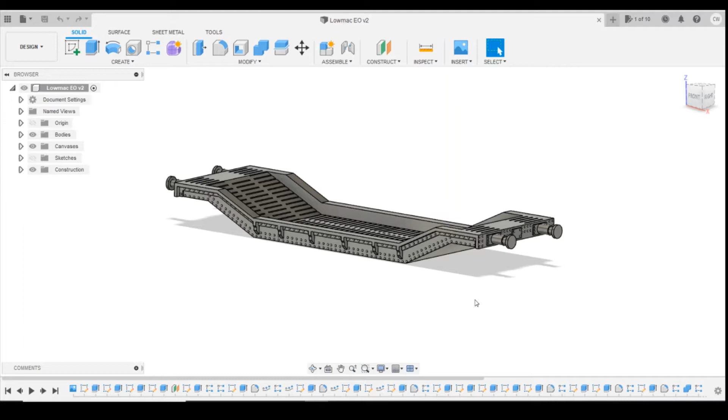Looking at the wagon itself, what we've got here is the W-iron in this area, axle box sitting in front of it, and then you've got your spring above, the ends attached to these hangers which are on the wagon. This is going to be the biggest problem really for this wagon, because normally you could do axle boxes and W-irons in two ways.

You could either print them as a separate part and glue them on like a kit-built type thing as you go along, or you could do them as part of the model. These bits here are going to make it really difficult to have them as a separate part, because obviously you can't then attach these bits here to the front here.

So realistically, in N gauge, what I'm going to be looking at is having this as part of the body itself. If I was to do it for some of the OO boys, I'd probably just leave these bits off, and then they'd have to do those using some plastic card or something like that.

So it's in this area here. Let's jump across back to Fusion. Okay, so now we're back in Fusion.

Next thing we've got to look at and think about is how much room we're going to have on the inside here. So what we can do is zoom in on the bottom edge here—this is going to give us the length from that point to that point. If I click on this edge, you can see down the bottom corner we've got a length of 17.4 millimeters.

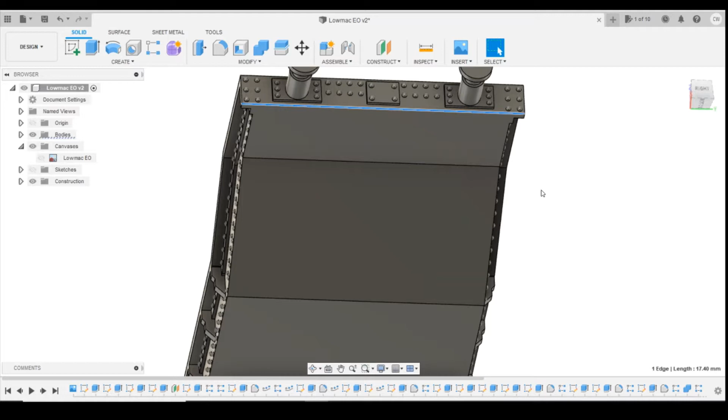So I'm probably taking it down to 15, maybe slightly below 15 millimeters, but it just takes away that sharp pinpoint. I haven't had any issues from doing that running some of my stock on the layout, but obviously the preferred method is to use one of the brass pinpoint cups.

Right, so the first thing I'm going to do in the software is to make our life easier—we're not going to draw it 4 times, only do it once. We're going to use our sketch history to roll back the sketch history past the mirrors, so we're only going to be having one part that we're working from.

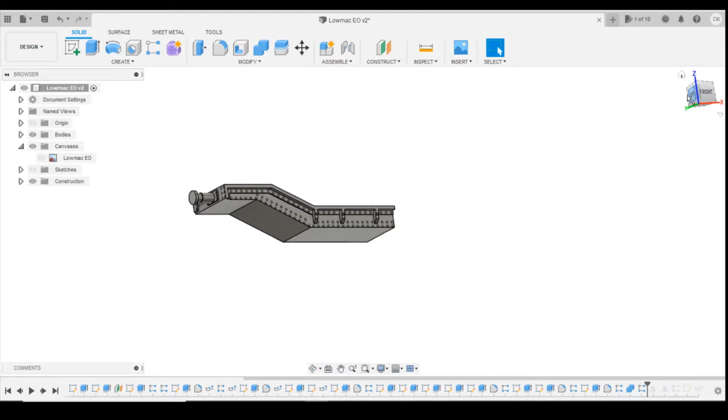Okay, so next thing I'm going to do is create an offset plane that we're going to use to draw the W-iron. So we're going to construct an offset plane from this back face here, and we're going to drag that across to about there in position.

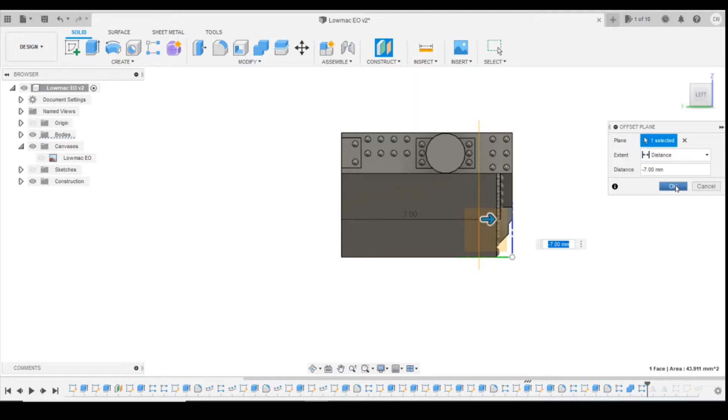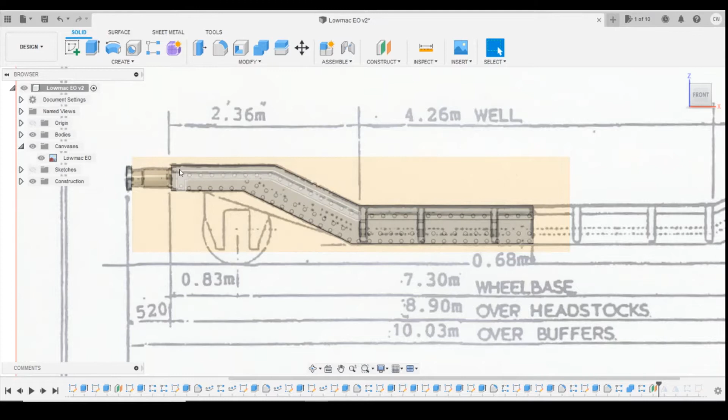Okay, so now we've got that offset plane. If we spin this round so we're looking face on, we're going to turn on the canvas with a picture of the wagon on it. We're going to use this to actually draw the W-iron. So as you can see, it's drawn on there, and we're going to create a sketch on that offset plane we've just had.

Okay, and we're going to copy around this W-iron. So we'll come down 2 millimeters and angle across, and then it comes to the midpoint of the axle. And then we'll draw a line upwards and click OK. We're going to use that line as a construction line.

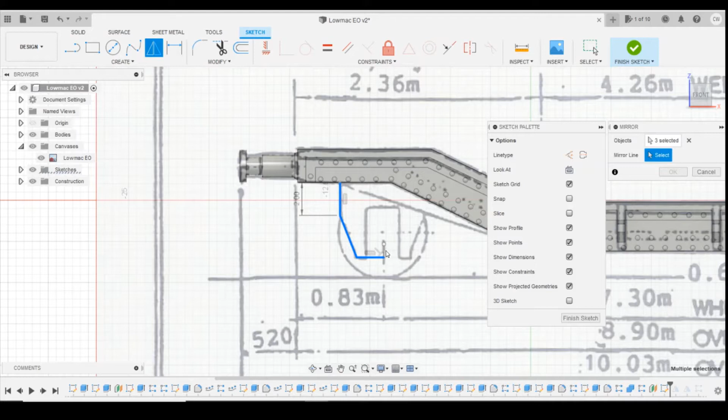So the next thing we're going to do is select those, and we're going to mirror those using that construction line there, so that we now know both sides of our axle are going to be the same size and shape.

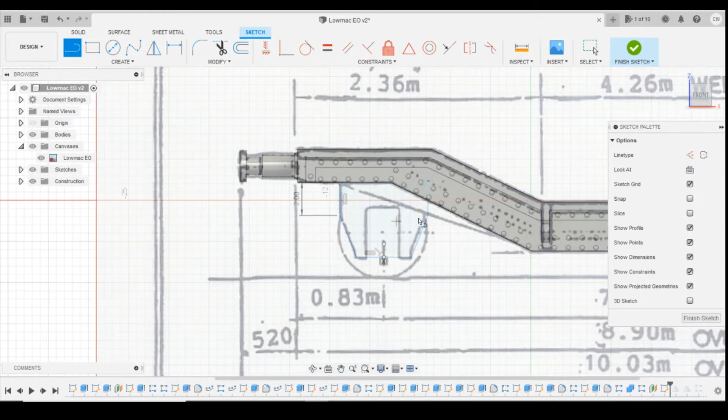Okay, obviously that's coming up behind into the body here. And to be able to extrude that, because as you can see it's not changing colour like the rest of it, I need to draw a line across here to join those up, so that's now a closed face. Okay, I can now come in and extrude on that surface.

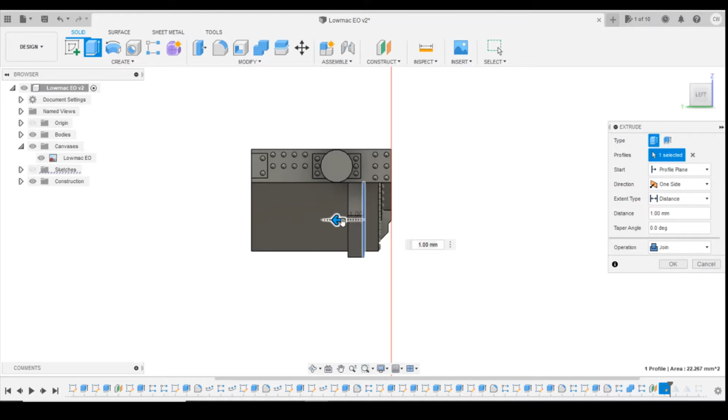So if we extrude that, we'll turn that around so we can see what we're looking at, and we're going to extrude inwards by 1 millimeter, and we're going to tell it to join. So what we've got here now is the distance from this position to this position.

Okay, we can inspect that at the top here with a measure tool. This should be about 6 millimeters, so from that corner to that edge, 6 millimeters. And if I measured my wheel, the outside faces of the wheels across the axle is just slightly over 11 millimeters. So obviously that's going to give me about a 0.5 millimeter gap each side.

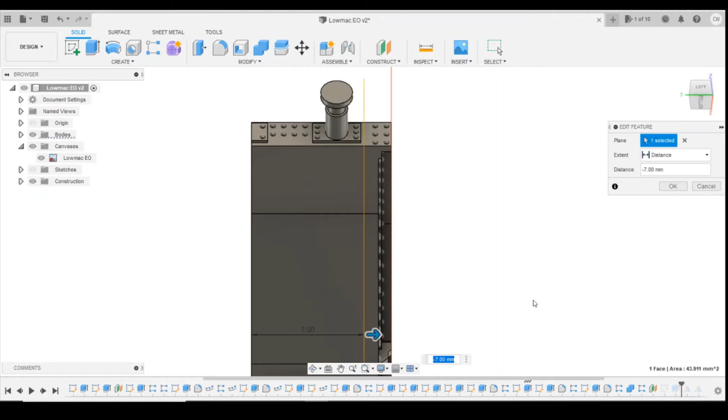Now I can change this, and I probably will change this a little bit. I'll probably just extrude out on this side slightly and dig this back in slightly. But the best way I can do that is if we go back to the sketch history, edit the offset plane, and we're going to change that offset plane to 7.3 millimeters. What that will do is move this extrusion across with it.

So if we now inspect this, we can measure from that corner to that face, and we've now got 6.3 millimeters, which gives us 12.6 millimeters in total, which is going to give us about 1.6 millimeters clearance across the axle between the wheel faces and the back of what we're printing. So I'm going to be quite happy with that.

Okay, so the next thing we're going to do is try and draw this backing plate off the axle box here. I'm not going to try initially with this strap here, I'm just going to do this square rectangular backing plate before the axle box. So come back into Fusion.

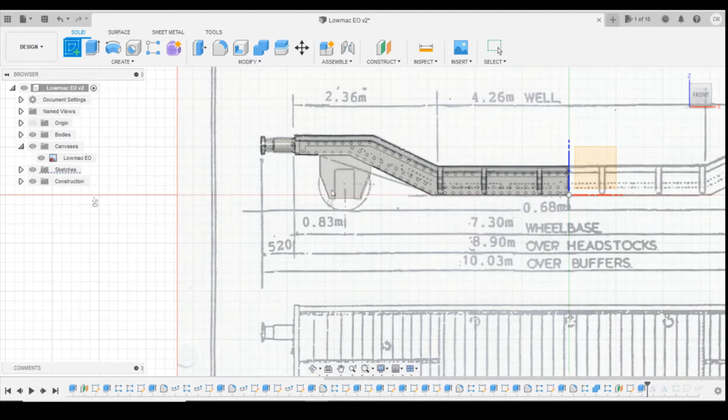We'll create a sketch on the front surface of the W iron. I'm going to use the center point rectangle, and we're going to define that point on that pinpoint where the axle's marked. I'm just going to drag that out slightly. Okay, I'm going to go there.

Okay, and what I need to do now is make sure this is centered across our drawing. And you can see that it's not, it's offset slightly. But that's because I don't think the drawing is 100% accurate, so we're just going to make the best of it.

We're going to define the distance from that face to that face. I'm going to go with 1.3 millimeters, and then we'll do the same on this side, that face to that face, 1.3 millimeters. Okay, now we know that's going to be centered across that position there.

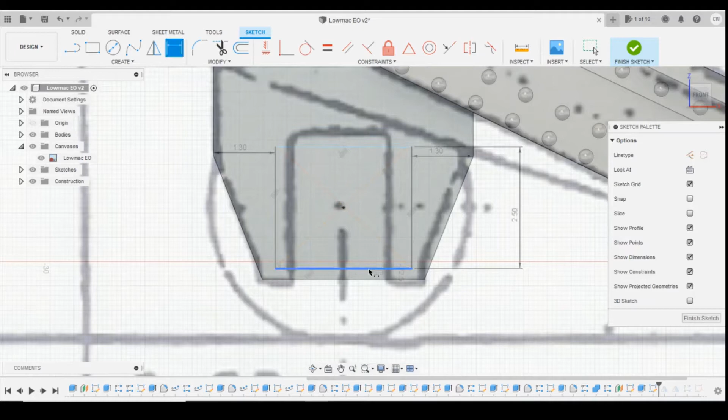We can then define the height. We can go 2.5 millimeters, and we'll define the height from there to there. It looks a bit low to me - yeah, it is, so I'm going to bring that up a little bit. Let's go for 1 millimeter, see where that moves it to. That's way too high, so go 0.5, and then we'll probably just bring this down slightly to 2.3.

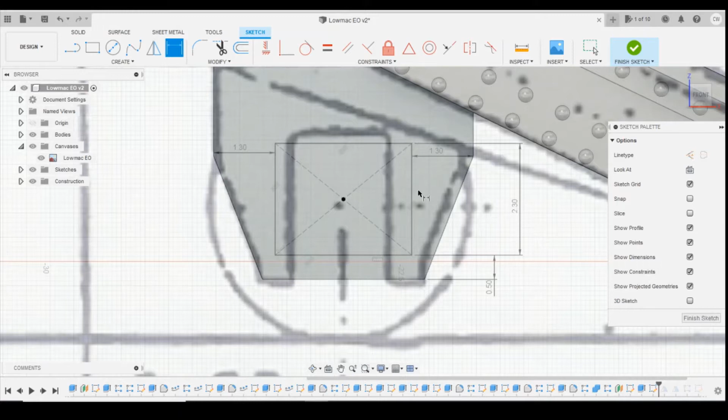Okay, so now we've got this in the position where we want it. We're then going to extrude this forward. And looking at the diagram or the picture we're looking at, it's not a particularly fat plate, so we're going to come out 0.3 millimeters.

Okay, so we don't need this canvas anymore, we can turn that off. So we've got this back plate, which is what we're working on here. Next we're going to do is the axle box.

Now if you look at that, it looks like it's not square, it looks like it's got an offset lump coming outside here. So it could be two rectangles with another rectangle coming across the middle here. That's basically what I'm going to draw now. In the double O, if you've got better pictures, maybe that's diagonal there, I'm not quite sure, but we'll go for 2 rectangles. In N gauge, you're not going to notice it, to be fair.

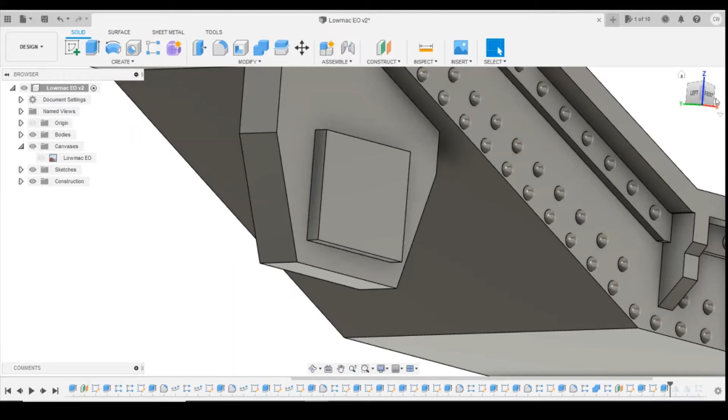So let's jump into Fusion again. We'll create a sketch on this front plane, and then we'll go back to the center point rectangle. We'll find the center point for this face, and it was full height to the body, so we know that's going to be 2.3, and we're going to go for 1.8 wide by 2.3. Okay, so happy with that. So you can fix that in position.

And the next thing we're going to have is a rectangle that goes the other way. So again, we'll go for our center point rectangle. We'll go 1.1 millimeters tall and 2.4 millimeters long. Okay, so then if we select all of these features, we can then extrude it.

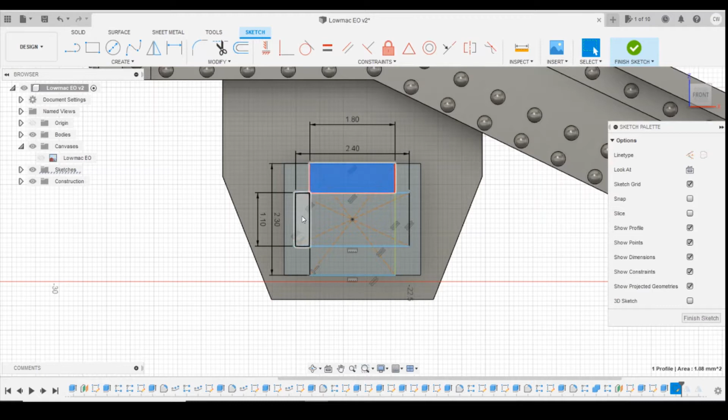Okay, so that's ready for the extrude. Let's have a quick look at the picture. Okay, and we're going to drag that about 1 millimeter. Okay, how's that look? Yeah, looking good, happy with that.

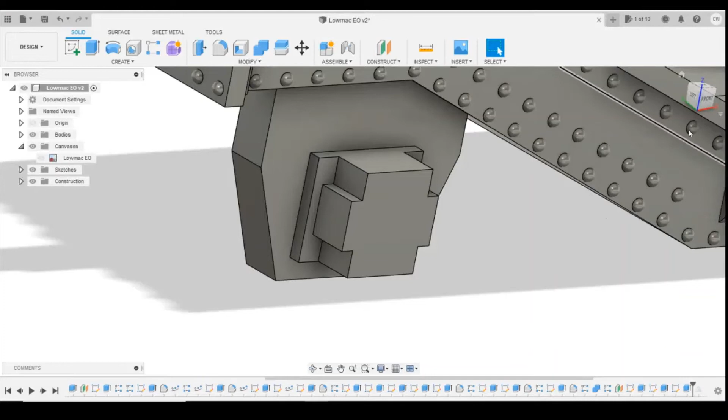Next, we're going to draw this strap coming up the back here. Actually, no, we won't. What we'll do is we'll draw the spring on the top here. Springs can be a bit of a pain to draw, and I just generally go to draw it so it looks like a spring. It's never going to be perfect. You're never going to get it looking exactly the same, and in N gauge you're definitely not going to be able to define the gap between each of the leaves on there. So I just sort of go for a shape that looks reasonable, and then work from there.

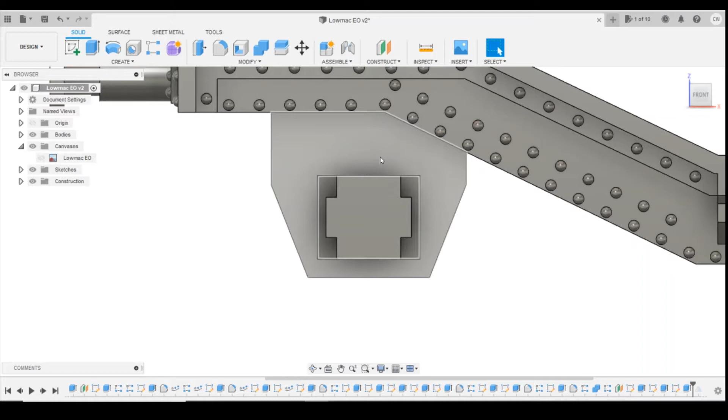Okay, so I'm going to start this leaf by drawing on that back plate there. Initially, I'm just going to draw a center line coming up here, and I'm going to change that line by selecting it into a construction line so I can then work from my midpoint here. Okay, so the next thing I'm going to select is a line and make sure that it's not on construction line.

Actually, I don't want a line, I want a... I'm going to go for a line. I'm going to start it about halfway up, and I'm going to bring the leaf across 2.5 millimeters.

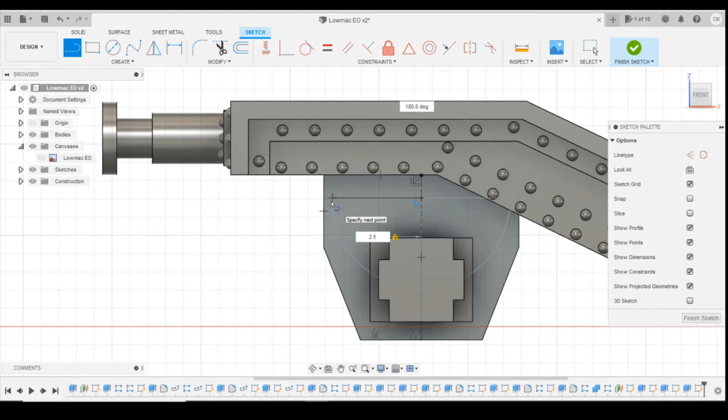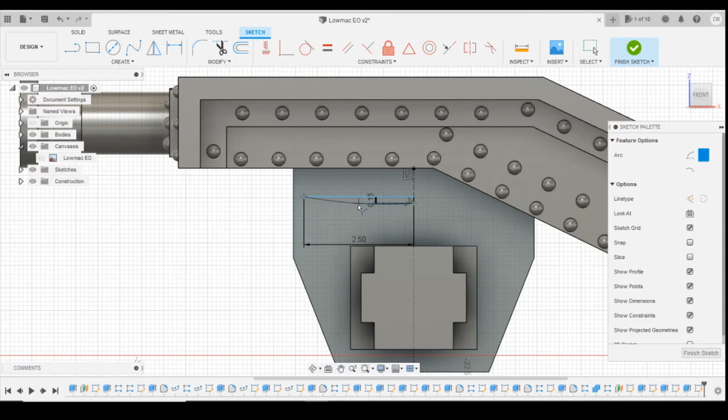Okay, and I'm going to draw a line down. Because the leaves are slightly curved, I'm going to use a bit of an arc here. I'm going to go 0.15 millimeters. Okay, the next thing I'm going to do is come into arc here, and I'm going to create a 2-point arc, use the 2 end points, and I'm just going to move this around so that I've got that curved and it's on the straight line here. I'm going to go back there. Okay, and then I'm going to fix that into position.

Okay, next I'm going to bring a line down here, 0.2 millimeters, and what I'm then going to do is I'm going to use an offset tool. I don't want the tangent, I don't want change selection. Turn that off. Actually, come back to offset, turn change selection off. I want that line, and I only want it 0.2 millimeters. And then I do again, offset line, 0.4 millimeters. And again, I keep working my way down until I get down to this top of the axle box here. So offset line, 0.6 millimeters.

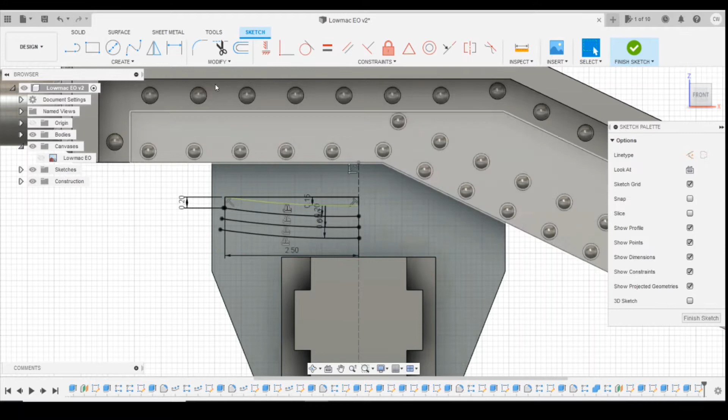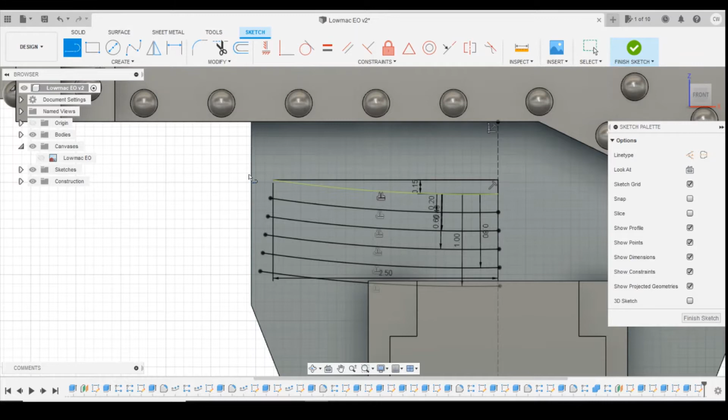Okay, so I'm going to go back in and delete that line out because I don't want that there now. So what I've now got is the leaf springs, each one coming down here. There's not going to be as many here as on the actual model, on the actual wagon itself, because you just can't define it at this sort of scale and size. So I'm just going to draw a line down there that connects, and then work my way down the leaves here so I get what looks like the same stepping design.

Start there, come down, there and down. Okay, and then what we can do is define that point to that point. It's 0.5 millimeters, and then do the same here, 0.5.

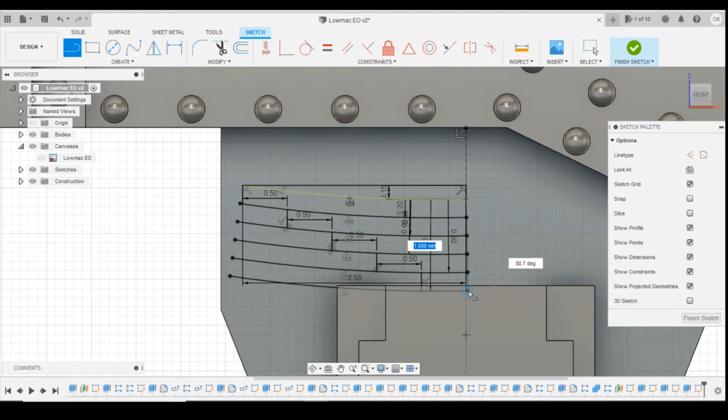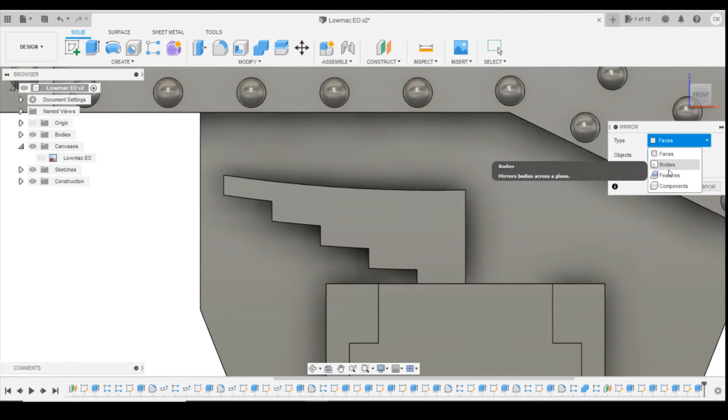Okay, and now we've got these here. What I'll do is draw a line that comes down this center line there, connects. That then will now enable me to select all of these like that, and then I can extrude that 0.4 millimeters, and then I can mirror this object across. So if we go to create, mirror, select those features, and the mirror plane will be that base there.

Okay, just check how it's all the same in one body. Okay, so you can see I've now got the shape of my leaf spring. I'm not going to waste my time drawing all these lines up and putting a tiny little sliver in there, because in N gauge you just won't see it, and in Double O you're probably not going to see it even if you look at them. They're the smallest of gaps between each leaf, so realistically it's just not really worth it.

Okay, so the next thing we're going to do is there's a cube or a box that goes over the top of the springs here, so we're going to draw that same thing on there. So we'll create a sketch on that face, 2-point rectangle, and we're going to draw that here, define the distance from there to that point, 0.3 millimeters, and the same, there's 0.3 millimeters.

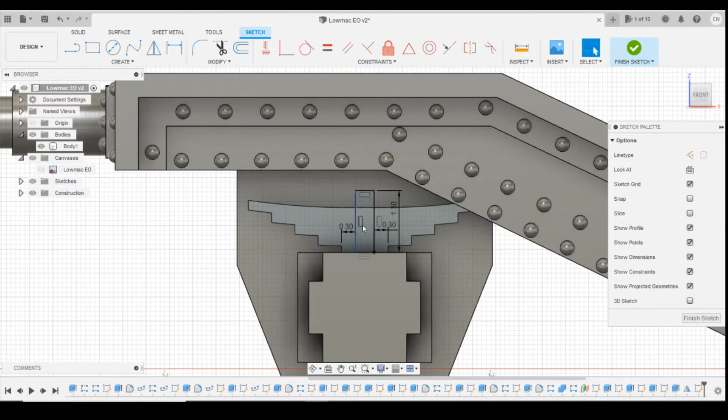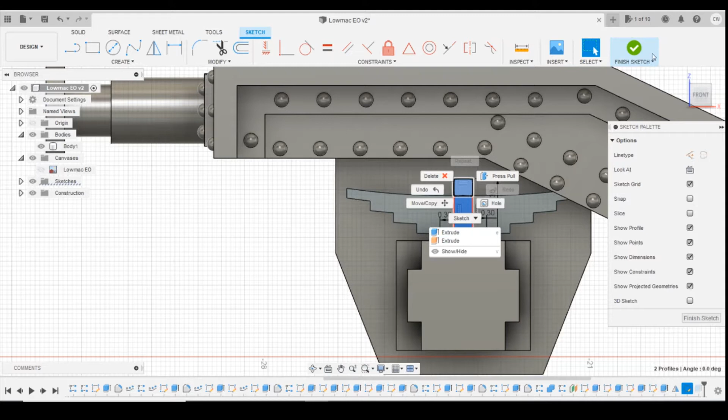Height wise, it goes, if we look at the picture, it goes up above the leaf springs here, so we'll go up above as well and define that length, 1.3 millimeters, and then what we can do is extrude those back into the face, making sure that it joins and not cuts. And what we'll do back is also go back into that sketch, and we'll extrude it forwards as well. Sorry, don't do that way. I want to go back into edit feature and do two-sided extrusion, and we'll come forwards slightly.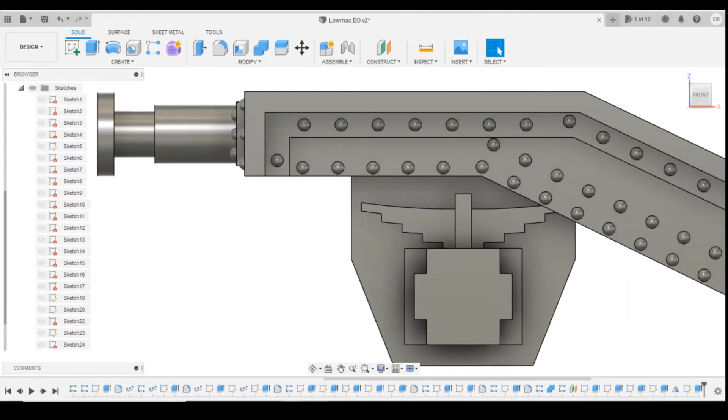Okay, so the next thing we'll do is this strap here with these 4 rivets on here. Let's see if there's a clearer picture on the other side. No. So we'll go with 4 rivets for the time being. So if we jump back into Fusion, create a sketch on that plane and a rectangle coming up, and we'll come just below the spring there, and we'll define it as 0.4 millimeters in width and 2.6 millimeters in height.

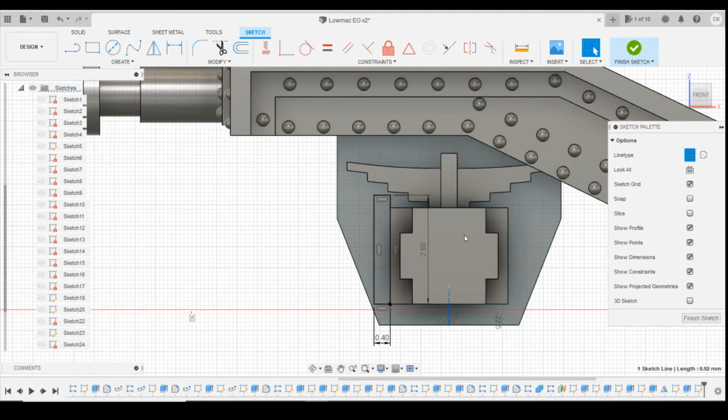Okay, and we want a construction line here. Turn that into construction, and the reason for that is I'm going to mirror this across. Actually, ignore that, because I'm going to draw the extrude and draw the rivets on first, then I'll mirror it across. So if we extrude this forward slightly, we can't come as far forwards, can't come as far forward as this plate here. So if we just extrude it 0.2 millimeters, that looks okay.

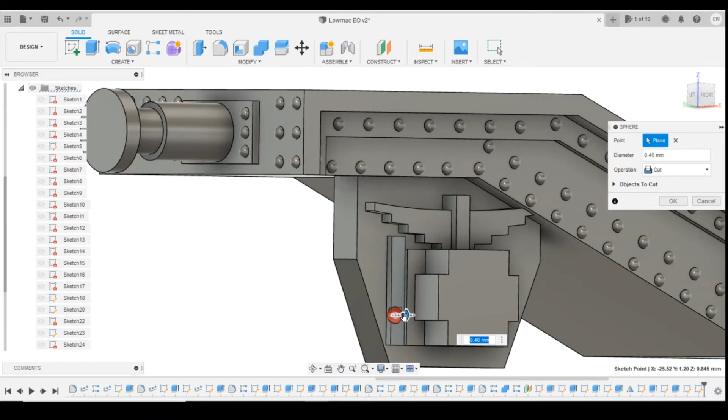And then we'll draw the rivets on the front here. Now, if you remember the last lesson that we drew rivets, we just used the center circle here. What you can also do, if we come out of that sketch, is do spheres. We can draw them on this face here. Okay, I don't like doing it because I find it difficult to place them. I just prefer doing it by drawing the sketch and filleting them.

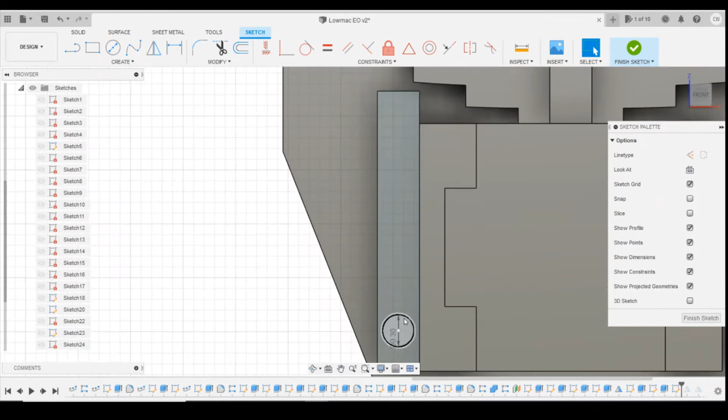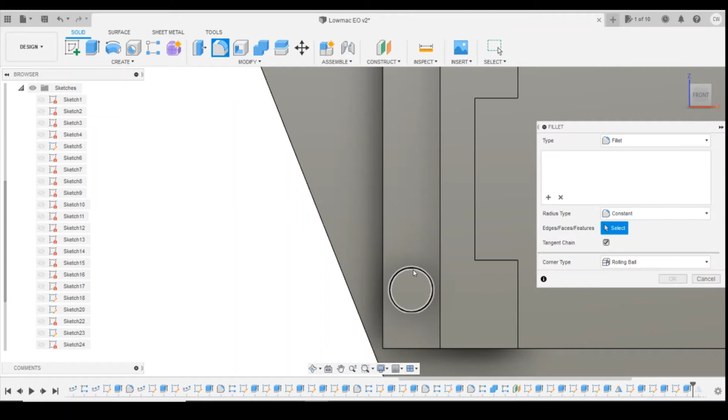Each to their own. So if we go back into this sketch here, and we'll do a circle, we'll find the center point, 0.3 millimeters, and we'll define the height, 0.4 millimeters, make sure it's in the center here, and then we can extrude this out, and then fillet off to top here, 0.15.

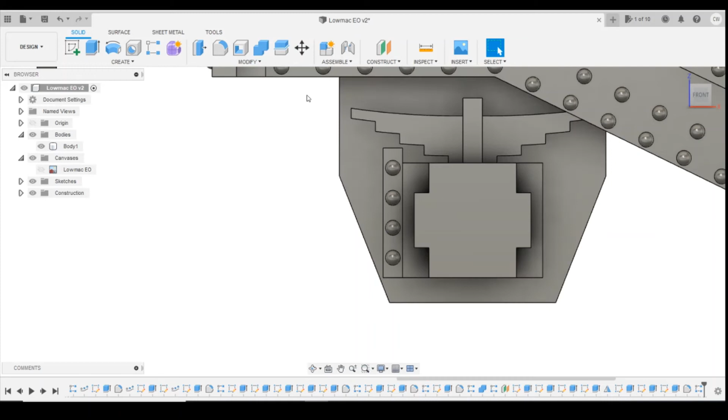Okay, and then we can do pattern, and we'll do select those, it's time to do faces, select those two, direction upwards, we need 4 of them, okay, and then what we want to do is mirror this all across here. Okay, so what we can do is the pattern again. So if we do pattern and extrude all of that lot in that direction, we need 2 of them.

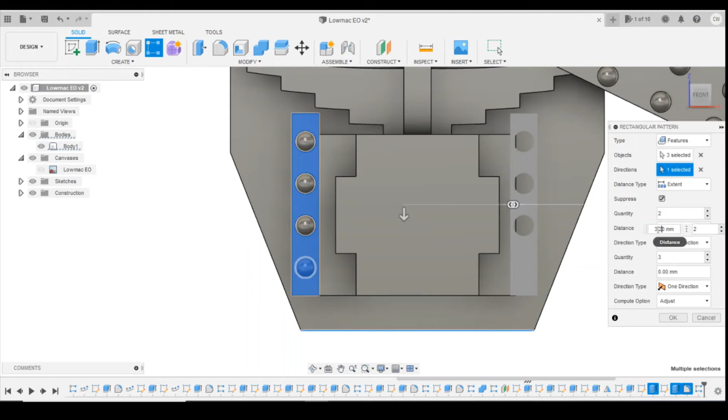How long was this face here? Need to move that slightly.

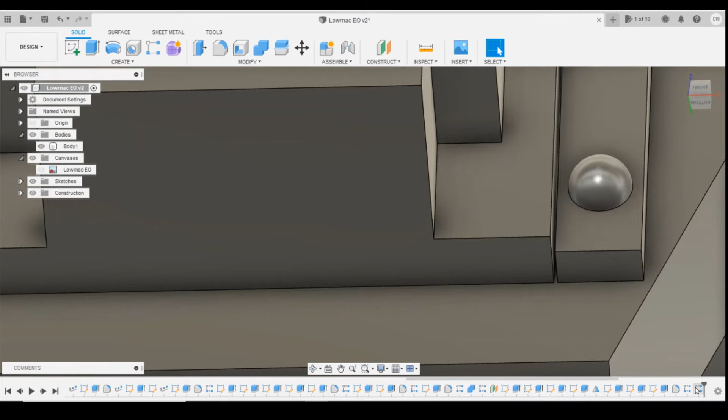Wait a minute, it's copying the whole of this face over. Let's have a look at this. Okay, so let's delete that. Come back into that one there, edit feature, and change it to new body.

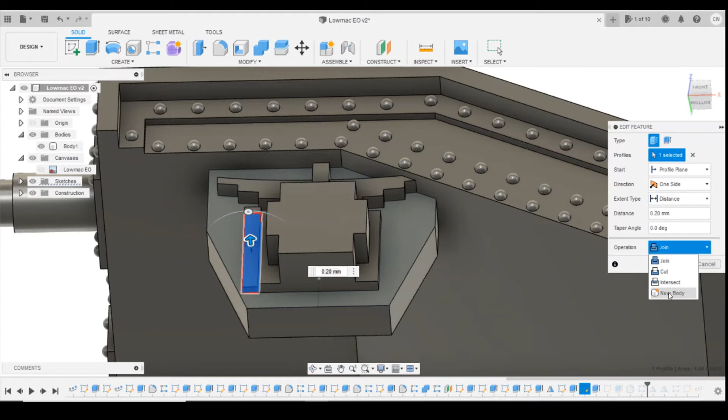Then what we can do is copy that over the correct distance, which is 3.5. So if we mirror that, and that, we can drag it that direction. We only need 2 of them.

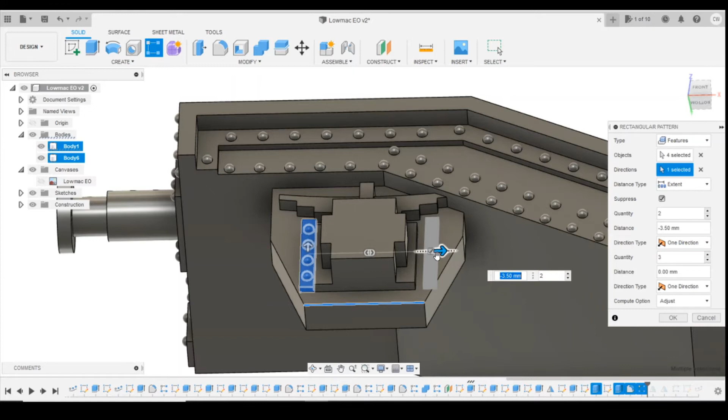And then what we'll do is we'll combine that body with those 2 bodies. Okay, so now we've got those straps on both sides there.

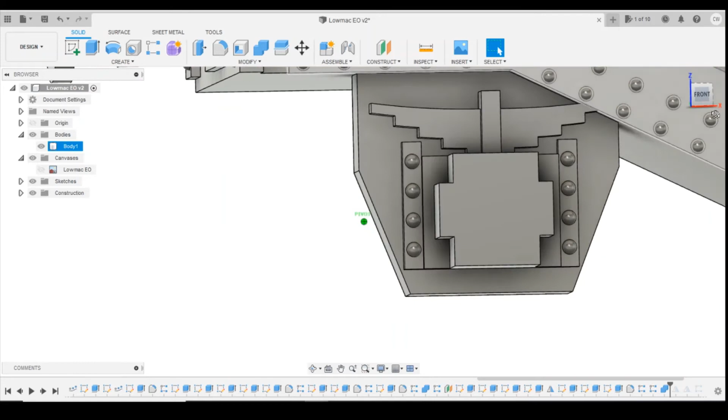So if we grab an offset plane, change to this face, and we're going to drag it across in line at 2.6 millimeters. And then we'll create a sketch on that surface there.

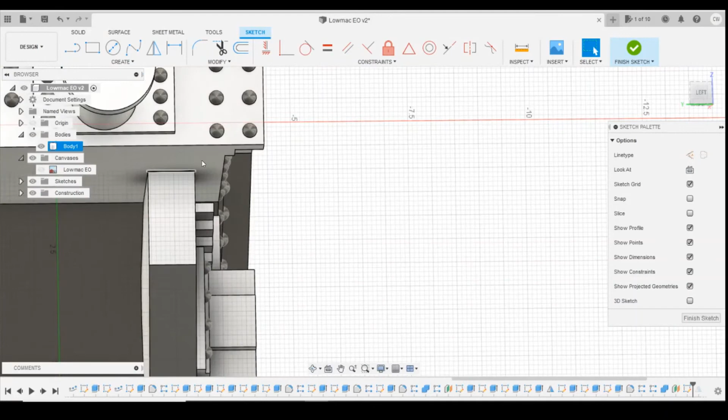Okay, so we're going to have a flat back, come forward, diagonal up, and then straight down off of the front of the sole bar here. So front of the sole bar is here. So if we have a line that comes down like this.

Move that point down slightly. Actually, it needs to be coincident to that line. You won't do it with that edge there, so we're just going to do it by eye. Okay, so it comes down, diagonal.

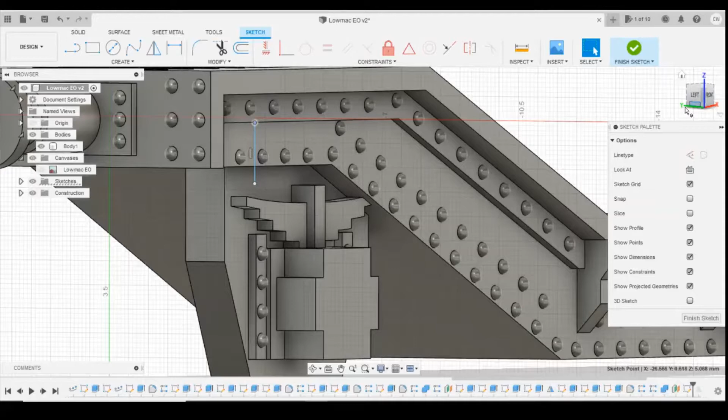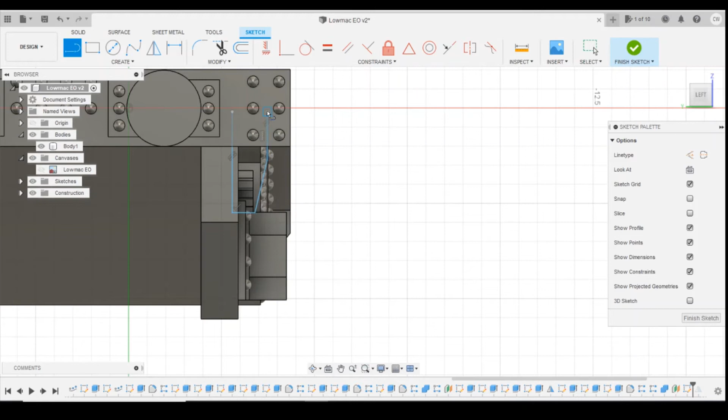Okay, so we're going to draw a line. Same height, I'm going to come down. It's in line with the top of the axle box here. Come forward slightly, past the spring, and then diagonal to that one. And then if I get another line, I can close that top surface there.

Okay, and then I can extrude that drawing in slightly. I'm going to tell it to join. It's going to come in 0.6.

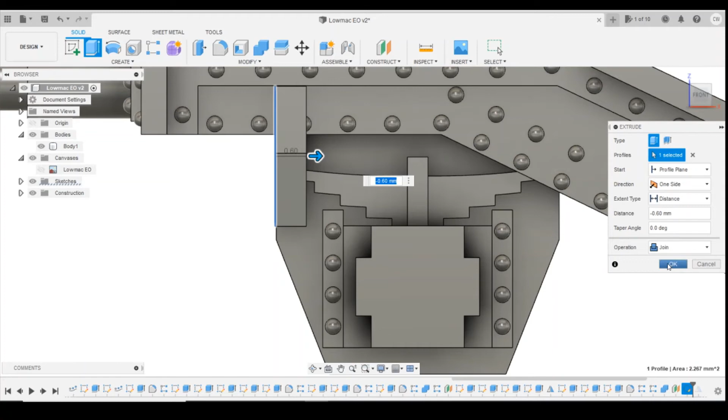Yeah, what I'm going to do is edit that feature. I'm going to have that as a new body to start with, because I want to dig out some of this inside here. So if we spin that round and we're going to draw on that surface there, we're going to find offset, change selection, that edge, that edge, that edge.

I want it on the inside to be minus 0.2 millimeters.

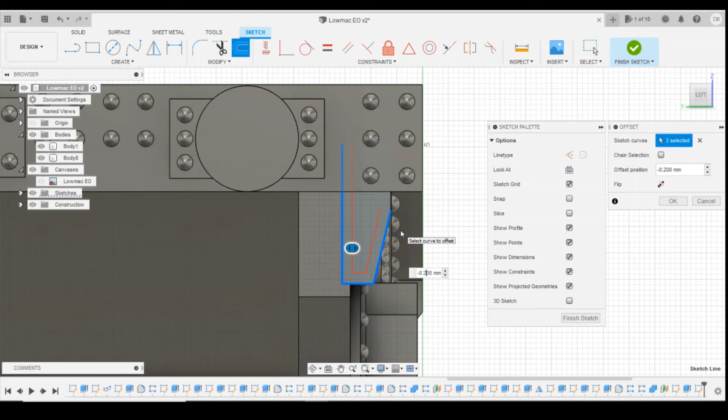I'm not sure that's going to print particularly well, to be fair. I'm going to cancel that. I'm going to leave it as it is. Delete that sketch, because if I dig that out, I think what I'll end up is it's not really big enough to print particularly well. So yeah, I'm going to leave that as it is there.

Okay, so if we look at the next one, it's going to be roughly in line with the bottom, but it's not going to be as high as the top on this one. So again, it's got a slightly different diagonal angle here, so we have to draw that shape completely differently.

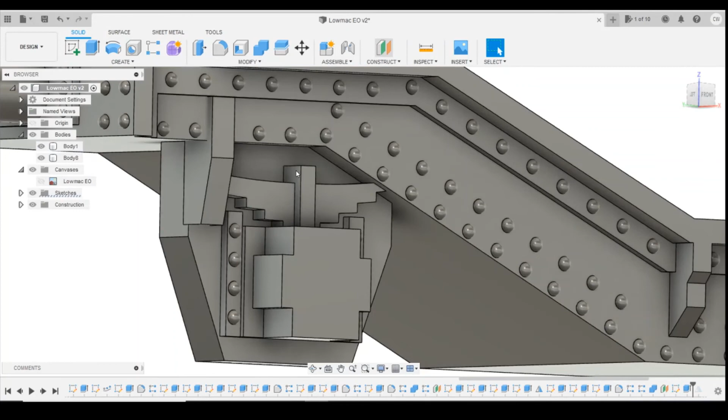Same process though. So if we come into Fusion, we'll create an offset plane, and we'll bring that across in line, about that position there. And then we'll draw on that surface there.

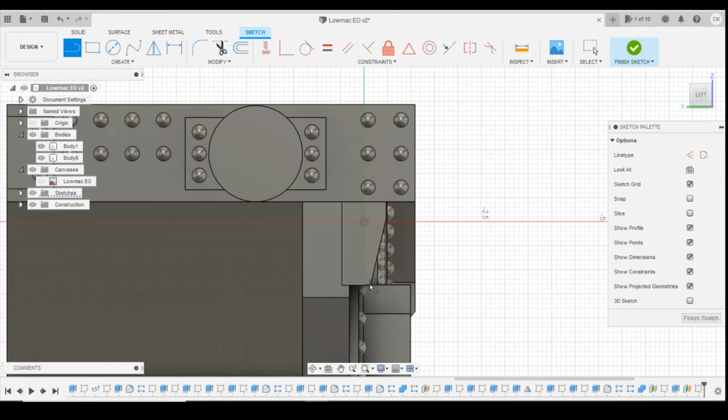Okay, so we know that the surface needs to be in line with this one and comes out at the same distance. So what we can do is the same lines there. We should be able to put, if I move that whole line down slightly, a horizontal constraint to those 2 points.

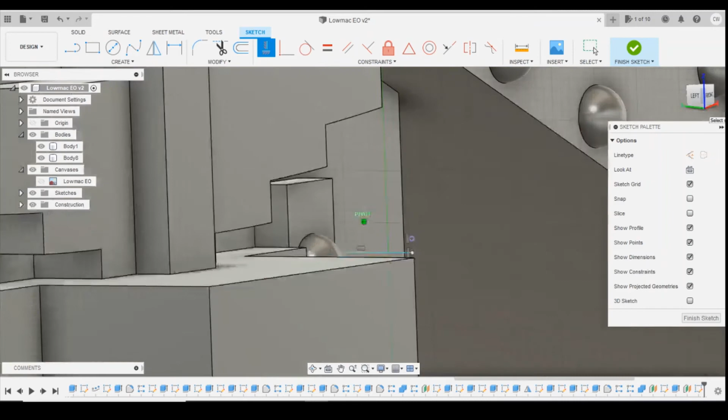Why has it not done that? I was expecting that to snap upwards. Let's take those out. Let's try coincident constraints. Yeah, that's the one I'm after. So it's the same height and the same length. Okay.

Then what we'll do is we'll draw a line. Let's spin that on so we can see where we're looking. Up here, so we can see how it's vertical here, because I've got that little blue square that appears in the corner, so I know that's at 90 degrees, like that. Come forwards, and I want it to be in line with this here.

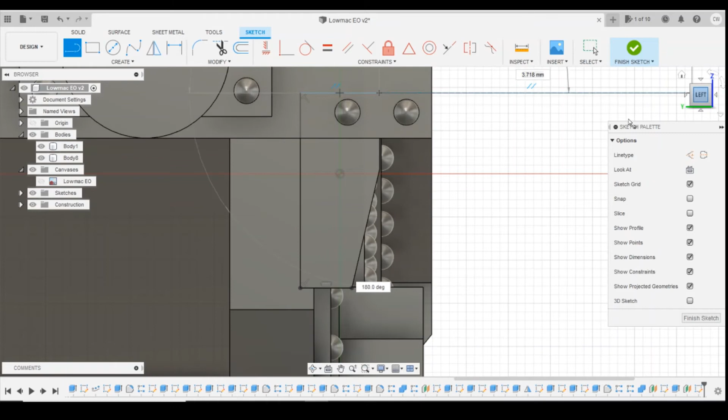So if I then do escape, horizontal, vertical, that point to that point, they should then snap in line. And then we can come down, spin slightly so we can see what we're looking at. Where's my line gone? Oh, I've turned it too much. Turn onto that face there, that's it.

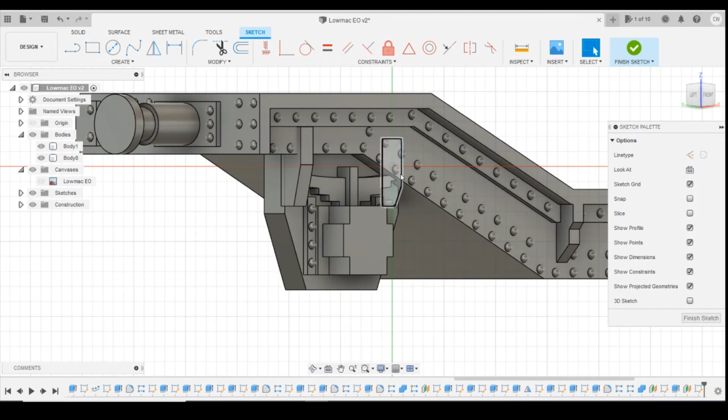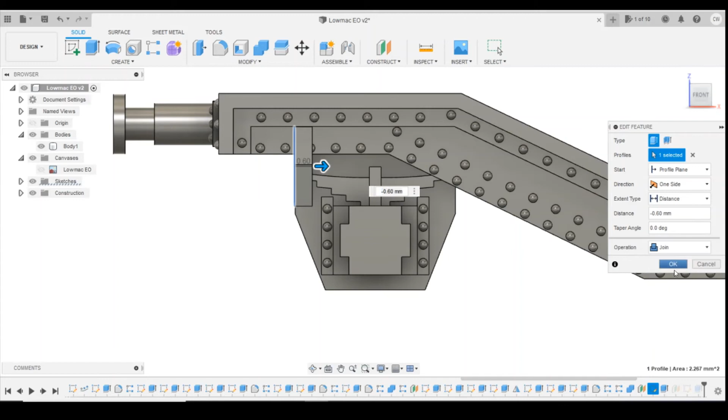Okay, so let's have a quick look in here. So it comes just below the sole bar and then diagonals into that one there. That's it. And then I can extrude the same distance as 0.6 millimeters. I'll take to join. We've got to combine these two bodies, so we'll come back to this one because we were going to do something different there, so we'll just tell that to join instead.

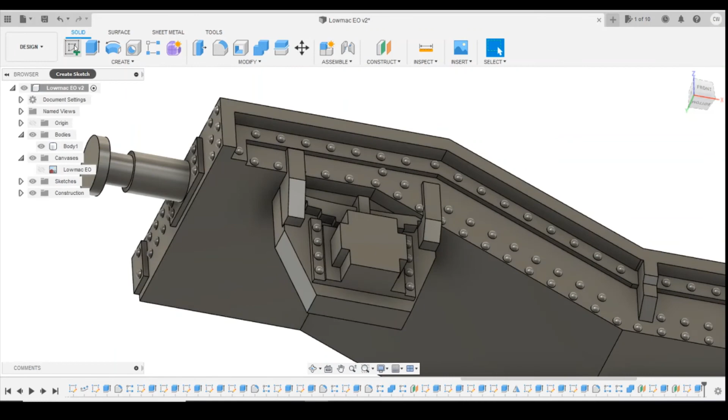Okay, so we've now got those two parts there. Let's just check the height of this. Yeah, that looks okay, it's quite a tall part there. And then the bottom of these have both got bolts and nuts coming out the bottom, so we're just going to draw a little pipe coming off the bottom here that's connected to this back plate.

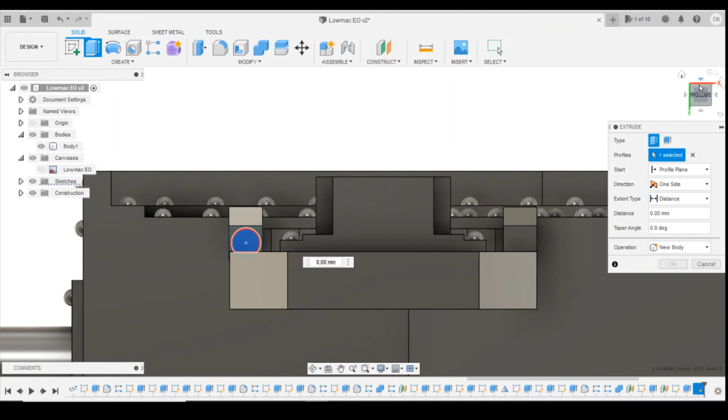So we'll draw on this bottom surface here. See how I'm making sure that part of this pipe is going to touch that W iron, so when I print it, it's going to be supported by the W iron. So we're going 0.5 and then drag that downwards. So as that prints, that'll all be part of it. So come down 0.6. What I might do is actually change the diameter slightly there.

So if I edit that sketch, let's go 0.4, it's a little too thick, that's it. Okay, and we'll define distance from front edge, 0.3. Let's just measure this. So that's 0.3 down here, it's 0.6. So define distance from the centre to there. It's 0.3, we know that's centred.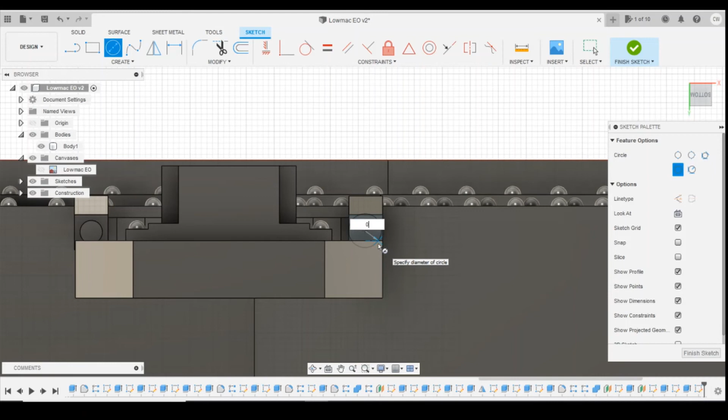Okay, we'll do the same on this surface here. Four millimeters distance there. It's 0.3, add it. And then if we extrude, all we have to do is select the bottom of that face and we know it's going to be the same height there.

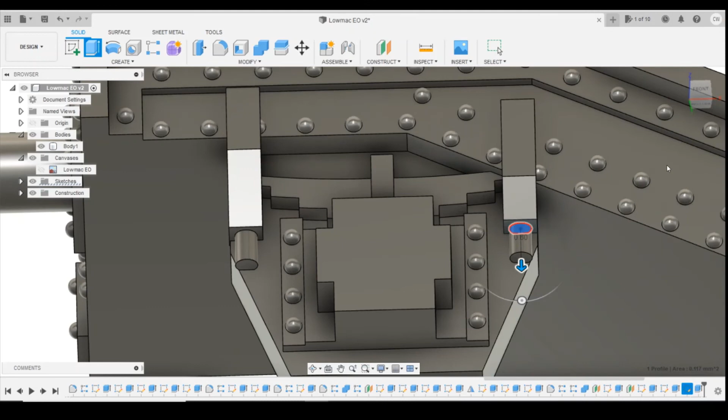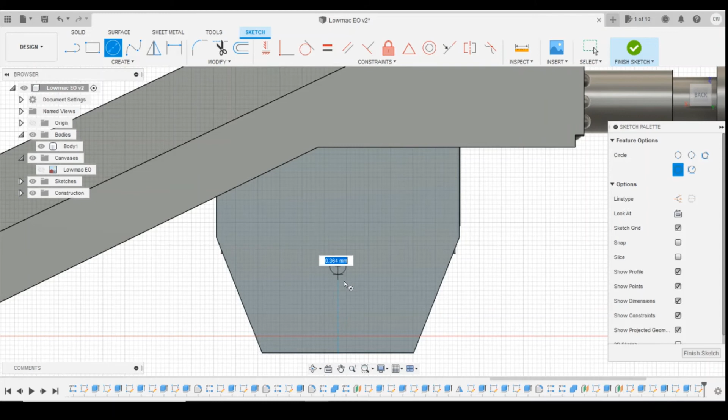Okay, so if we create a sketch on here, we come to center point circle. We'll find this midpoint here by running along the bottom edge till we get to this triangle. We'll come up and I'm going to draw 1.8 millimeters. The reason for that is obviously it's 1.6 millimeters in diameter for the cup. I want a little bit extra.

It may need a little bit more because sometimes resin swells, so you may need to drill this out a tiny little bit with a pinpoint drill just to make it perfect. Or what you could do for future runs, if you're going to print multiples of them, is obviously once you've printed the first one, you'll know how much it swells, whether it's okay or not, and then you can come back in and change the sketch in the future. So we'll just go for that 1.8 millimeters to start with.

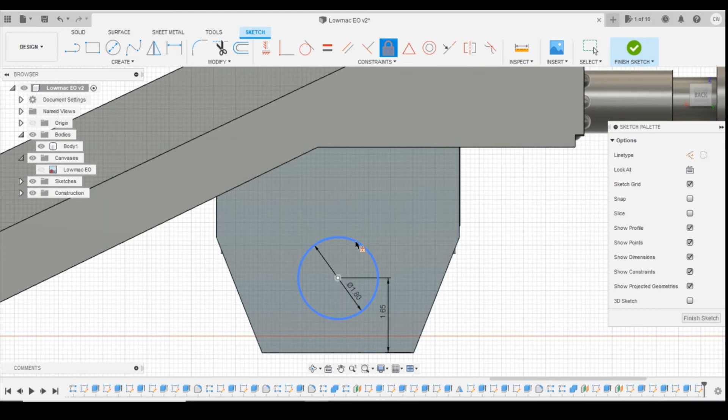We'll define the center point with 1.65 millimeters upwards. We'll fix that in place. We'll then extrude that into the axle. If we look at this, it was 1.3 millimeters, so we'll need to give ourselves a little bit more than that. So if we extrude inwards, if we go 1.5, that should give us enough room there to fit it in all the way.

And then as you can see, there's enough block around the outside to not give us a concern with this bit, this inside wall being too thin. If we look at the front surface, it's a bit close on these corners here, but that should be okay because all this is supported off of this back plate here. Okay, so that's your basic WI. Go look at this sketch here.

If we look at the sketch, we've got things like a couple of bolts here you could draw on. I think there's a bit of a bent out beam here, not entirely sure what that's about. And there's obviously too much darkness, too much shadow in here to give you a clear view of what's going on up here.

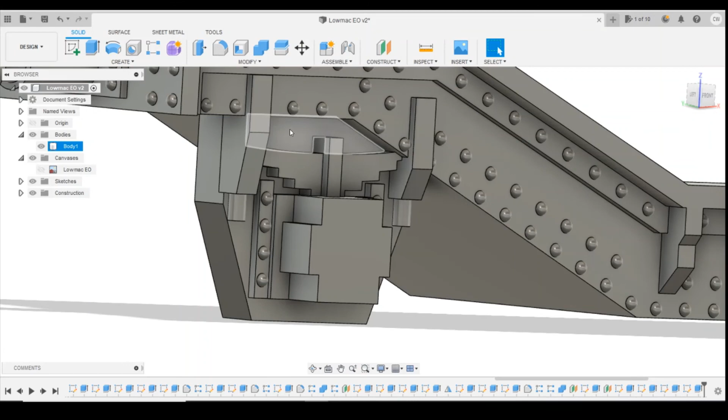But whatever you do draw, you've got to be mindful how small it's going to be, and whether it'll be able to print it or not. I'm looking at this WI and thinking I'm pretty comfortable with how that looks. In N-Gauge, it's not going to look particularly detailed once you've printed it. At the end of the day, when you're running this round on your layout, you're going to be standing 3 foot away from it, pretty much looking at that. So the detail you need to put under here needs to be quite minimal.

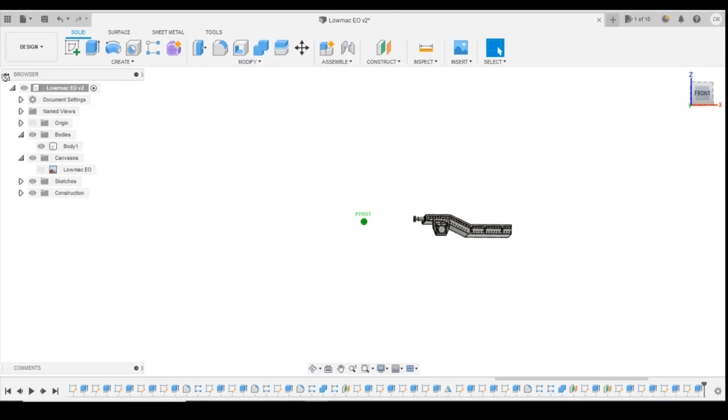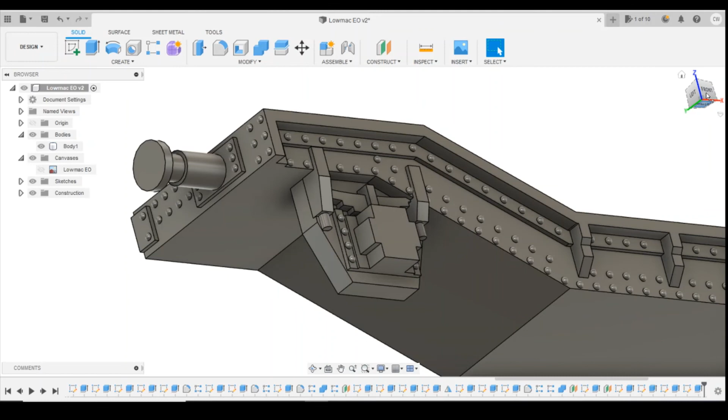I don't particularly go for drawing all the brake rigging and things like that because you're not going to see it. If there's quite large cylinders, air cylinders or anything, then I would go and draw that in here as well. But for the WI we're working on today, I'm pretty happy with how that looks. If most of you copied that, you'd end up with a wagon that works perfectly fine for your layout. Okay, so let's jump forward in your sketch here.

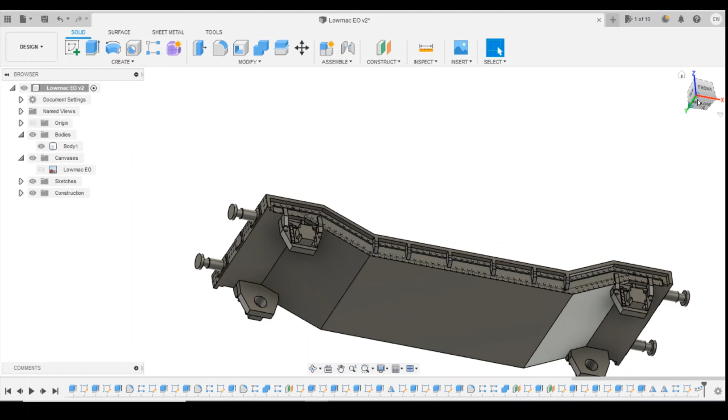That should then mirror those 4 W-irons across around all of the wagon. One thing you may need to be thinking about, and this is the problem with Lowmacs, is what we're going to do about the wheel here. Because the diameter of a wheel, including the flanges, is 7.1 millimeters.

So you're looking at 3.6 millimeters from the center pinpoint upwards. What we may need to do is dig out some of this material here to make the wheel fit inside this archway. If we look at this back edge here, we can draw a line and it gives us some idea of how much room we've got. As I said, the diameter of the flange on the wheels I've got is 7.1 millimeters, so that gives us 3.6 millimeters from the pinpoint. Obviously 3.6 millimeters gives you no play, but looking at that, you're not going to have a lot of room here for a wheel.

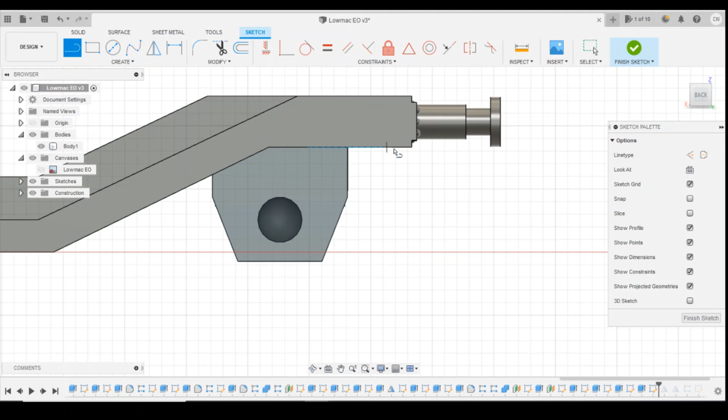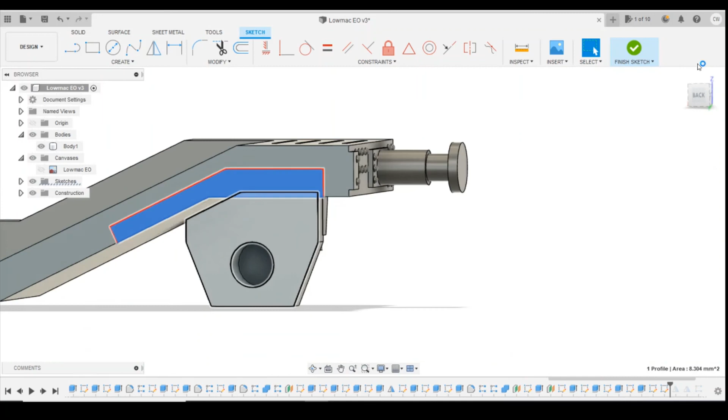If you are looking at having to do that, all I would do is draw - coming out of that sketch, create a sketch on this back face on the inside here, draw a line upwards like this, however high you need it, down like that, and then you can just extrude this into the wheel here, into the wagon.

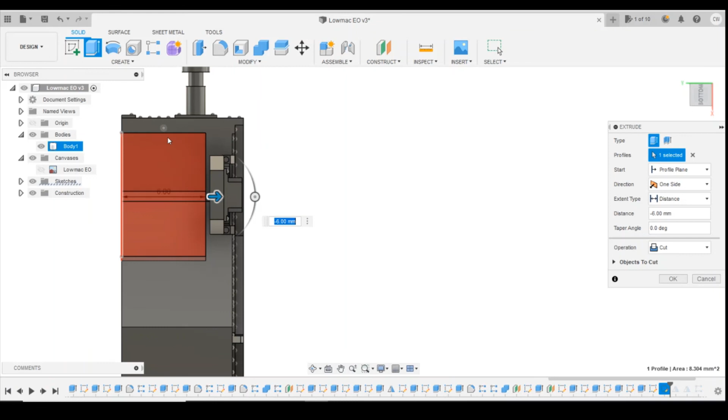Obviously you don't need to start on this outside edge. What you could do is create an offset plane from that edge and just come in to where the wheel's going to be, into this position here, so the wheel sits in like a little well, and you're still maintaining this chunk here without losing the integrity of the body. Yeah, that's how I'd look to go about doing that.

If you get any questions, please feel free to ask. I hope you've enjoyed that and it's helped you understand how I go about doing the W-irons here.